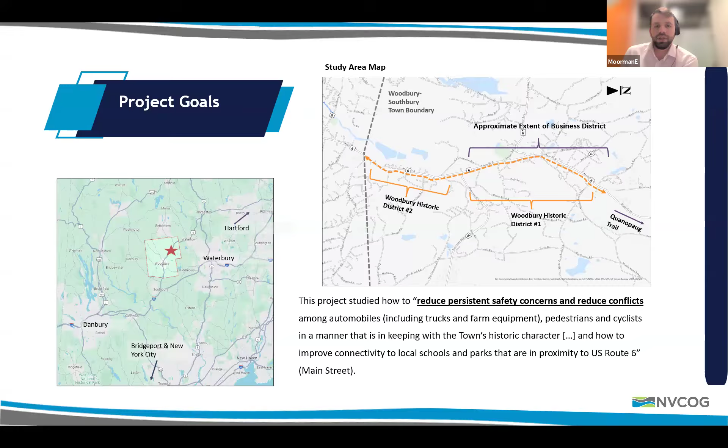So I'll just take a minute on the project goals and scope review. We're charged with reducing persistent safety concerns and conflicts among automobiles, pedestrians, and cyclists in a way that maintains your town's historic character. We also want to improve connectivity to local schools and parks close to Main Street. Our focus is on Main Street, but we're also charged with recommending sidewalks and other strategic connections east-west. Here on the image in the top right, we see the 2 historic districts in your town.

Here's the scope. We have five different sections: public outreach and engagement, data collection and analysis, future conditions, concept development analysis, and number 5, final report and implementation plan. So we're creating the final report now, but of course we welcome your views on concept development.

Throughout the whole process, I want to really thank you all for your feedback. We have 2 advisory committees, the TAC and the PAC. The TAC is more technical and involves a lot of CTDOT people. We met with them a week and a half ago or so, and we've taken their feedback and incorporated it into what you're going to see here. Hopefully that will be fruitful for us. And throughout the whole project, we've had project management, of course.

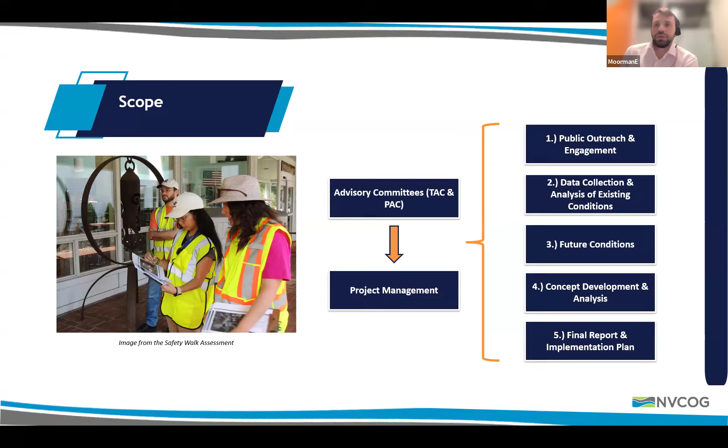Okay, I just want to break this into 2 sections. As I said earlier, we have the initial concepts and cross sections along the entire corridor. We analyzed the feasibility of creating a shared use path based on topography, spatial availability, physical constraints. The presence of utility poles was a big input in this analysis in your town, and of course, integrating with existing and planned facilities.

So we analyzed a shared use path. It's also sometimes called a side path, but we try to keep using shared use path for consistency. It accommodates all users, pedestrians, bicyclists, and others in a shared space. You can separate them, but generally speaking it's best to think of it in a shared manner. This was chosen because it most completely separates users, pedestrians and bicyclists, from drivers, which is appropriate on larger streets with higher traffic volumes. We know that biking and walking with traffic, especially once you get to higher volumes and speed, is uncomfortable. So we propose to completely separate the users.

Additionally, we are building on the work of the Woodbury Plan of Conservation and Development, which is the town's planning bible at a high level at least. And that mentions the importance of improving bicyclist safety and comfort.

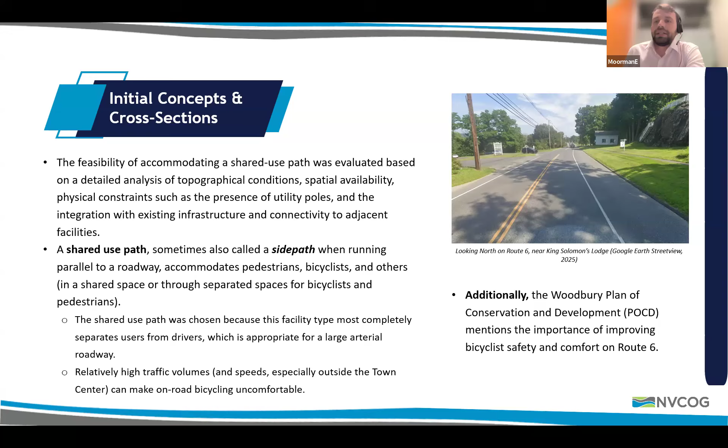So here I just want to show you a little bit more detail with the shared use path and why we're using it. As you can see on the bottom left, the FHWA, our federal government, offers guidance on recommended facilities. On the left axis you can see volume, vehicles per day, and speed on the x-axis, miles per hour. Generally, as you get higher volumes and higher speeds, you have to offer increasing levels of protection to maintain that level of comfort.

I just wanted to show where we are in Woodbury. In terms of miles per hour, we're certainly north of 25, 30, sometimes 35 miles an hour. And in terms of volumes, we're looking at 8,000 or so, or a lot higher if you look on the left. So it's generally over 8,000; in some locations it's a bit higher.

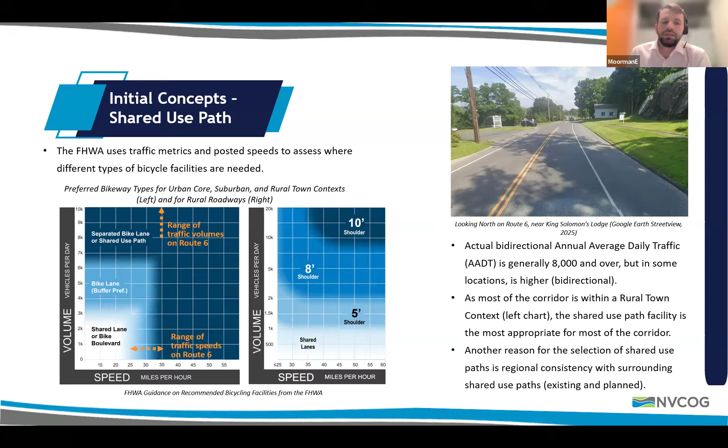Because the corridor is within a rural town context, which is the left chart, the shared use path is the most appropriate. This chart here on the right shows what you can do in a more rural environment outside of town, where a shoulder might be more appropriate. But we're within the town, so we're going to use the one on the left. Another reason is that we are trying to tie into surrounding shared use paths, existing and planned, so we think building on that makes sense.

For design principles, it can range from about 8 feet at the very minimum for short distances, to ideally 12 to 14 feet, which is good when you have higher volumes. You can include a 4-inch center line stripe, but this is not necessary and not recommended in the project area, as we don't anticipate that level of bicyclist or pedestrian volume. Of course, you need shoulders, clear space, and ideally a horizontal separation between the road and the shared use path of about 5 feet. Importantly, when crossing roadways, you can elevate the shared use path as well, and we recommend that in certain areas.

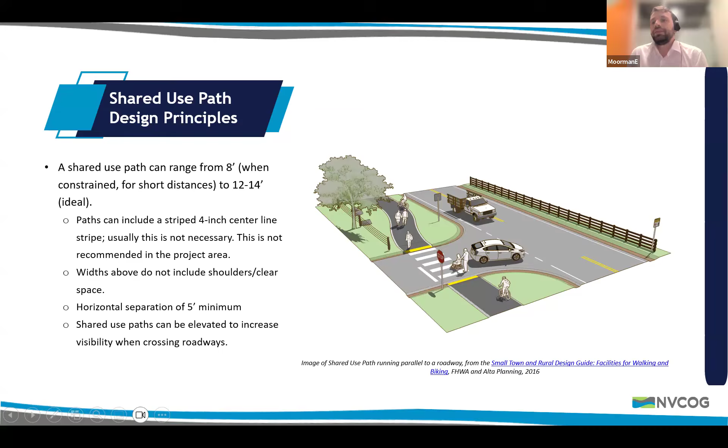So here's the general concept laid out. It's proposed along the east side of the roadway in the southern portion of town, extending from Woodbury Place, we're calling Constantine's Restaurant, that general area, to the intersection of Hollow Road, Doolittle Hill Road, Main Street, Park Road. At that point, or slightly north of that point, we're proposing to cross over onto the west side of the roadway to boost connectivity and accessibility for the central section of town.

As I'll talk about a little bit later, there is a short alternative where the path stays on the east side until 317, and we'd love to hear your views on that. But at that point, it would cross over at 317. We're recommending major urban design improvements near Hollow Park, and then other strategic intersection improvements.

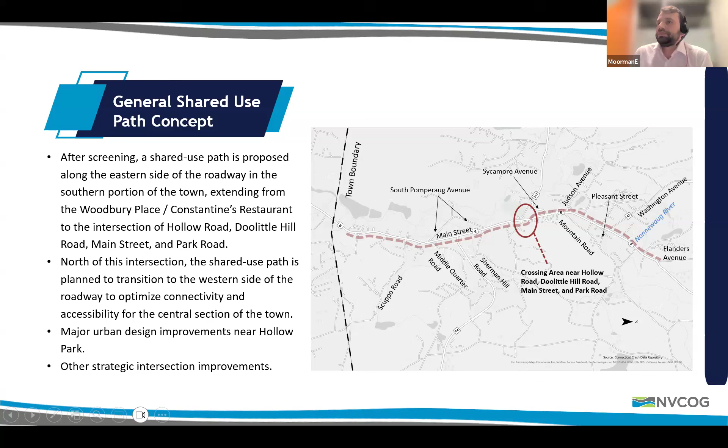Here's just some sample dimensions. In the past months, we took the existing widths of the different components of the right-of-ways. You can see here on the top left and the bottom left at 2 different locations. Location 1 is between Sherman Hill Road and Old Sherman Hill Road at the Dollar General, and location 2 between Highway 317 and Mountain Road.

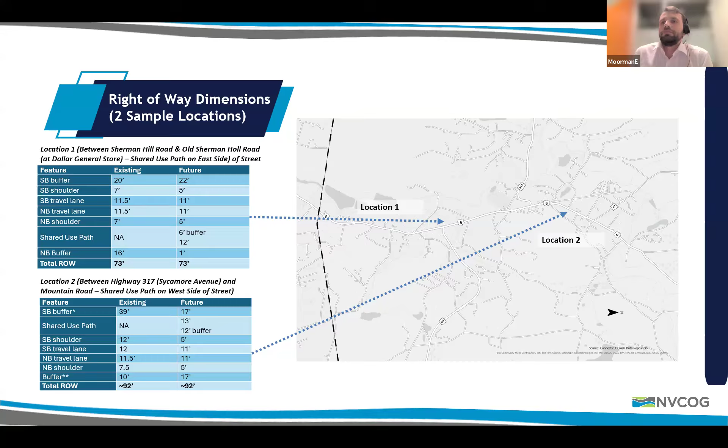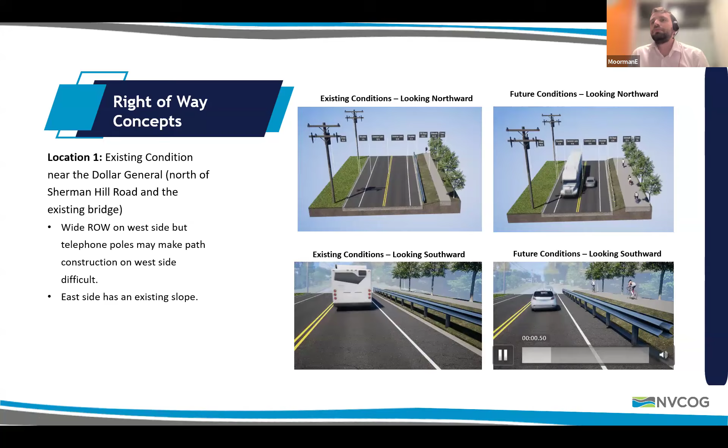Location 2 is near Drakeley Real Estate, just north of the intersection with 317. As you can see here, the top shows that high-level view, and now we are on the west side of the street, and you can see that nice wide path that you have in your town on the west or left side. Just give me a second, the animation seemed to slow it down.

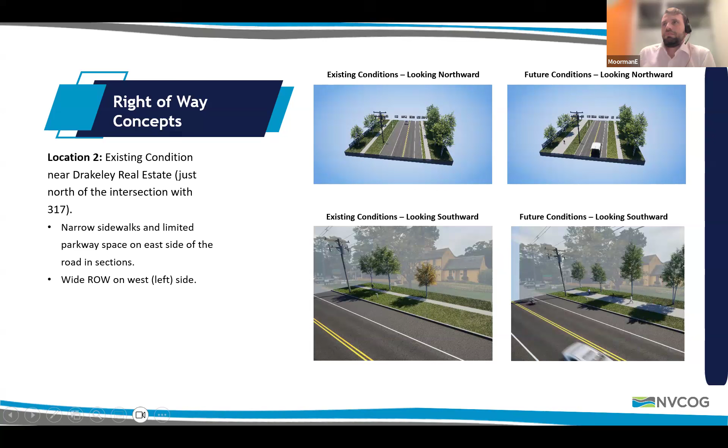Okay, so where does the path begin and end? As I mentioned, on the southern side, we're proposing it begins at Woodbury Place, Constantine's Greek Restaurant, which is on the east side of the roadway. So we'd start there, and then on the northern end, it would extend to Flanders Road to serve dense housing developments on Quassuk Road. However, we'll talk a little bit more about this.

Middle Road Turnpike could serve as an interim northern endpoint if you break it into stages, as we're recommending, and that would allow students to access Nonnewaug High School. And we'd recommend an RRFB to help people cross at Middle Road Turnpike. So that's sort of where we're going: Woodbury Place all the way up to Flanders Road, with an interim point of Middle Road Turnpike.

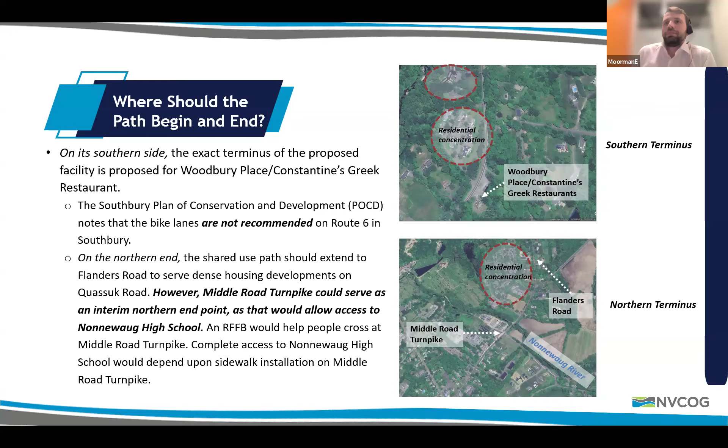So here I'm just going to quickly go through these, because I'm going to go through them in more detail in a minute. We'd start here on the east side of town. We've identified some sightline issues near Curtiss Road. We go north, and we are recommending an RRFB just a little bit north of Constantine's Restaurant, because there are communities here on the west side of town, some condos and dense housing developments that we want to make sure have access to this shared use path. They're on the west side, the path here is on the east side, so we'd recommend adding in an RRFB with other treatments to increase safety.

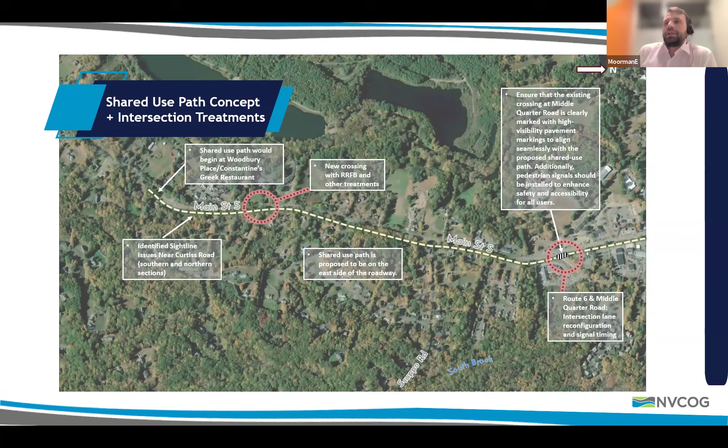So we go up on the east side of the roadway, cross Middle Quarter Road, and we put in high visibility pavement markings, and install pedestrian signals to enhance safety and accessibility for all users. At the same time, we do intersection lane reconfiguration and signal timing.

Hey Evan, just before you go, there's a question—do you want questions during it, or do you want to wait until we're all done? I think we can take a few questions now. Go ahead, I have a general question.

When you talked about the RRFB, those are the rapid flash beacons. Can you briefly explain what that is or what it looks like for these sections? I'm sorry, can you repeat the last part of that? What does it mean for these sections to have the rapid flash beacons?

To serve as a warning, coming up against the curves? Go to the picture, Evan, of the existing one. Let me—I forgot, was that back? And while you're doing that, the purpose of the RRFB is that it is more visually attention-grabbing, it draws more attention than just a sign. You had it right there—yeah, so that's an RRFB.

So it's a sign mounted, essentially an enhanced warning sign. The warning sign normally just tells you there's a crosswalk here. The black box below the little arrow on the post flashes when activated, and that's what drivers will see, particularly at night, but also very noticeable during the day. So it's essentially an enhanced warning sign, the most aggressive passive measure we have.

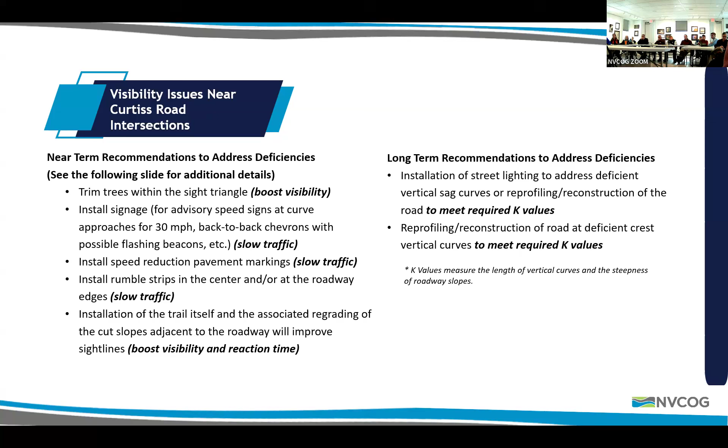I just want to share a follow-up on that. One of the major criticisms we have about the current one is that some drivers can't see it because the sign is set too far back from the road, and they don't see it until they're right on it. So are you saying what you're proposing in this new section will be different? It will be closer to the road? Yes, the sight lines will be better.

Yes, I know what those people are talking about regarding the one near Mountain Road. This one, the one we're proposing here, we've looked at the sight lines. They're much better. I wouldn't say more appropriate, because that implies the other one's not, but it's a much better set of sight lines than the one in town today.

One thing is, I think it's important to think about RRFBs in concert with other features. We've heard from all of you and others about the lack of efficacy of the RRFB on Mountain Road near Judson, and we are proposing improvements there too. We want to make sure you understand that we're working to boost the RRFB's visibility, so we sometimes do other treatments with that, and I'll go into more detail when I talk about Mountain Road.

Okay, any other questions for now, or good to go? I think we're good right now.

So here I just want to show you, the trail would be on the east, with these housing developments here on the west, and there'd be a sidewalk on the other side of the road, to allow people to get to the RRFB and walk to the north, cross, and get to the path. That's another recommendation we're making there.

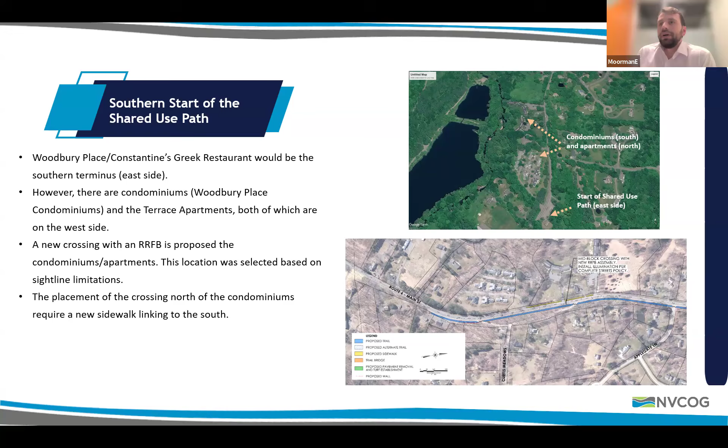There are some visibility issues near Curtiss Road intersections. There's a speed limit of 40 miles per hour at this point. There's a vertical crest along the roadway which reduces motorist line of sight, shown here in number 1, creating a potential safety hazard. Immediately south of Curtiss Road, the horizontal curvature of the roadway creates other sightline obstructions due to vegetation, stone wall, and utility poles, which also limits visibility.

South of Curtiss Road, shown here in number 4, there's a vertical sag curve which currently meets a 20-mile-per-hour design speed, so it's designed for 20, but people are going 40 or sometimes even higher. Then, number 3, as you move north, there's an additional horizontal curve with some sightline issues.

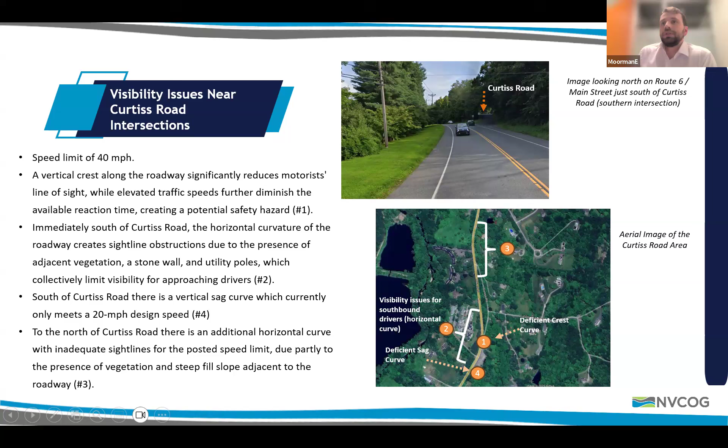So there are some existing problems here that we want to improve. We have near-term and long-term recommendations: trim trees within the sight triangle, install signage for 30 miles per hour, back-to-back chevrons with possible flashing beacons, which I'll show you in the next image, speed reduction pavement markings, rumble strips in the center and/or at the roadway edge, and installing the trail itself. The regrading required and cutting of foliage will automatically boost visibility and reaction time.

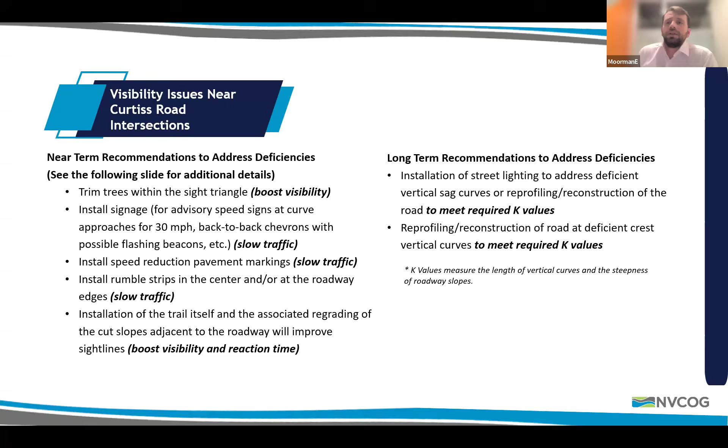Long-term, we recommend installing street lighting to address the deficient vertical sag curves, and reprofiling or reconstructing the road at deficient crest locations. That's a long-term thing we're recommending.

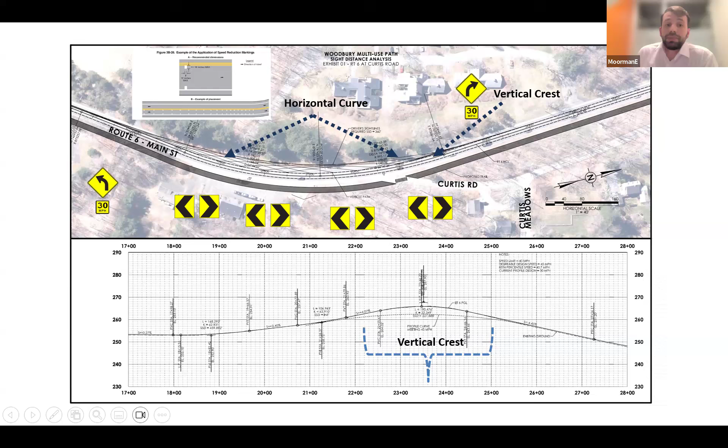Here you can see what that looks like. On the top left, there are speed reduction markings, little white markings in the roadway, that automatically narrow the road as it appears to drivers. This means drivers react as if they're driving faster than they are, because of these repeated dots. That's one example of what we're recommending at that location to slow down drivers, especially since we're talking about installing an RRFB there.

Okay, Middle Quarter Road. The main concern we heard is that if you're going west and hitting Route 6, there's a pretty broad westbound approach lane, with mixed traffic sharing an unmarked 33-foot lane, which is rather confusing and could cause some danger.

So we propose reducing that to 14 to 15 feet and making it clear that it's one lane instead of two to three. We feel this could enhance safety and improve pedestrian and bicyclist crossing comfort, as well as driving safety. There's very minimal impact on traffic flow, and the future level of service is expected to remain an A, which it currently is.

We recommend high visibility crosswalks with stop bars across all roadways. The stop bars in particular would discourage drivers from blocking in pedestrians. There would also be new pedestrian signals and a new sidewalk on the west side of the roadway, shown there in yellow.

We're also creating a small new green space near South Brook. It's not a huge amount of green space, but it is a modest increase, and hopefully will be more aesthetically pleasing and environmental. So that's what we're proposing at that intersection.

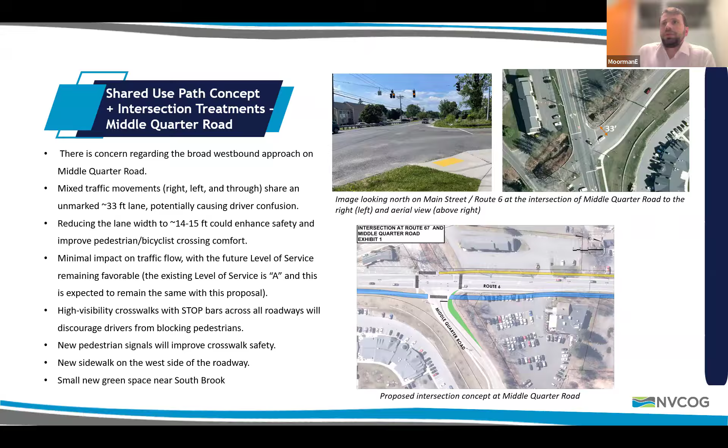As we move north, I want to give you a high level view of what I'll talk about over the next minute. At Sherman Hill Road, Route 64, we're talking about upgrading signal timing to improve operations, narrowing the right turn pocket on Route 6, and creating some nice new green space. At Hollow Road, as we've discussed, we're switching from the east side to the west side, with a whole suite of improvements that I won't go into on this slide, but will on subsequent slides.

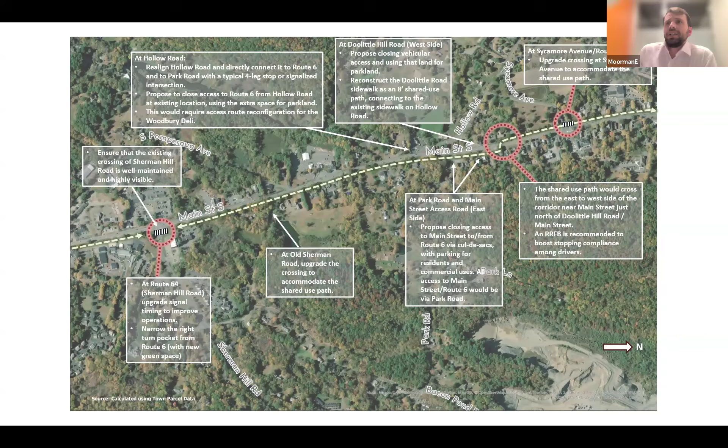And then at Sycamore Avenue, Route 317, we'll upgrade the crossing to accommodate the shared use path. I'll go into more detail, particularly at that Park Road location. But first, let me talk about Sherman Hill Road.

We'd maintain the current travel pattern generally speaking, while upgrading signal timing, integrating that with the new shared use path on the east side. We're proposing to preserve the two existing high visibility crosswalks at the intersection to maintain pedestrian visibility, and recommending adding a new crosswalk on the north leg.

We want to retain existing left turn movements from Route 6 Main Street and the left turn lane from Sherman Hill Road, Route 64. The big change here is shortening that right turn pocket from Route 6 and using that space to add new green space south of the intersection. This will also slow down traffic and help increase safety there.

We're proposing to keep the shared left and through lane on Sherman Hill Road. The existing and projected level of service would both be a B, so this would not degrade traffic or make it worse.

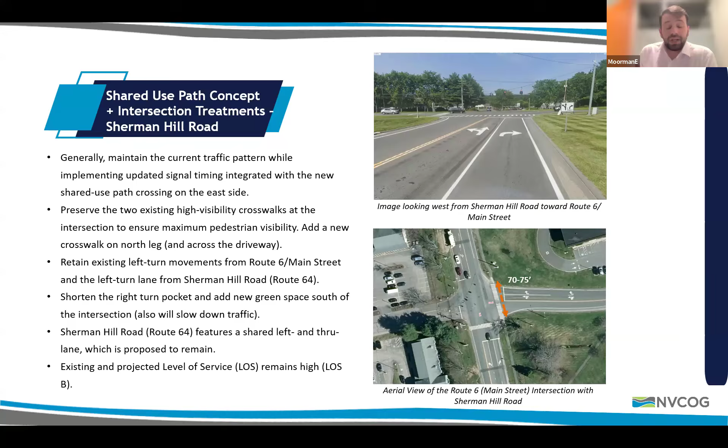Here you can see what that looks like. There's that new green space as we're shortening that right turn pocket. There's also a new sidewalk on the south side of Route 64 linking to the Woodbury Flea Market, shown in yellow. That's a location people had talked about wanting to access quite a lot, so we added that sidewalk connecting to an existing sidewalk there.

And then we're proposing sidewalks or shared use paths on both sides, which would require new bridges over a little waterway.

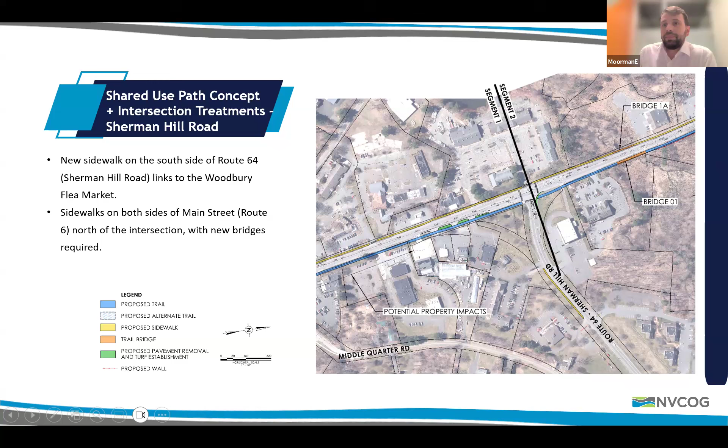Here's the main location we talked about: Doolittle Hill, Hollow Road, Park Street, Main Street area. The general concept is to switch the shared use path from the east side to the west side at a mid-block location near Main Street. There's an alternative, which is to continue the path northward on the east side without crossing the street, then cross later at Route 317. I'd love to hear what people think about that.

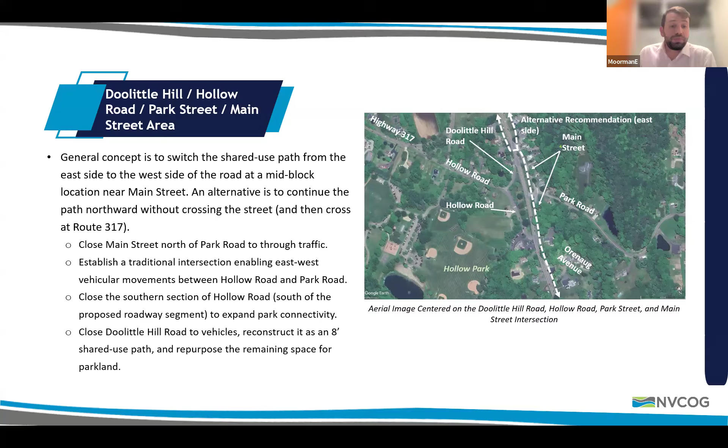Here are the different components of what we're proposing. We're proposing to close Main Street north of Park Road to through traffic and establish a traditional intersection to enable east-west vehicular movements between Hollow Road and Park Road. We want to close the southern section of Hollow Road, south of the proposed roadway segment, to boost park connectivity and tie the park closer to the town. Then close Doolittle Hill Road to vehicles, reconstructing it as an 8-foot shared use path, using that space for parkland.

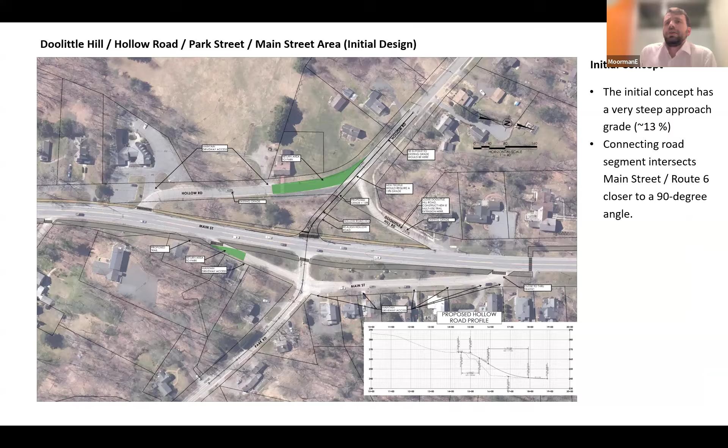So this was the original concept, and I want to show you how it's evolved. The green shows the new green space we're proposing, and this new traditional intersection here. The initial grade was very high on the roadway, so we changed it from 13% to 10%, which is still a pretty steep grade, but a lot better.

Access to homes and businesses from Main Street would use an access road from the south. Right here, as you can see, we still maintain access to these homes and businesses respectively.

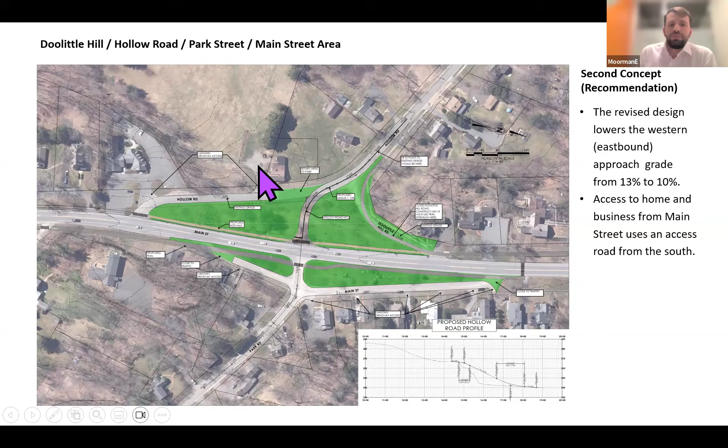The third recommended concept is this, and there's an option within that concept to keep the trail on the east side. After talking with the TAC, we heard that many people make left turns here from Route 6 onto Hollow Road and Park Road, so we decided to add left turn lanes on Route 6. Because of that, we want to keep this crossing away from those left turns. There was discussion about moving the crossing into the intersection itself, but we decided to keep it north of the intersection right there, and this crossing would have an RRFB with advance yield markings.

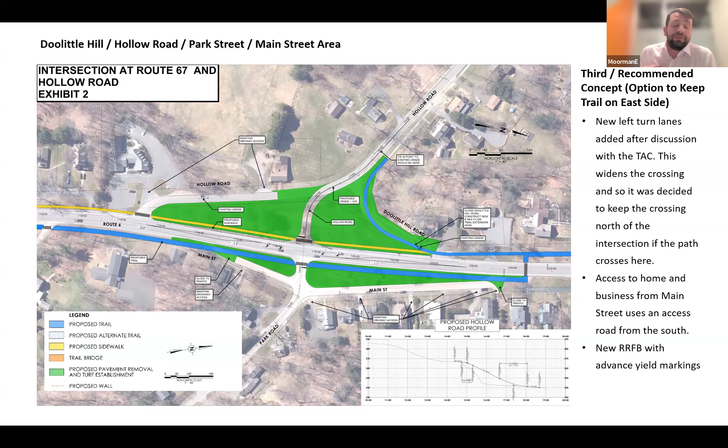So that's the concept we're at right now, and then there'd be that shared use path going down into the park. You'd gain a lot of connectivity and we feel better access to the park. But we'd love to hear people's thoughts on that.

We were able to do this because traffic volumes were pretty low, but there are still some issues with this. The new grade, 10%, is still steep for certain drivers at certain approaches. We're still maintaining driveway access for these two businesses here. We are recommending to add left turn lanes, which helps drivers, but of course it widens the cross section and potentially could make crossing a little bit more difficult.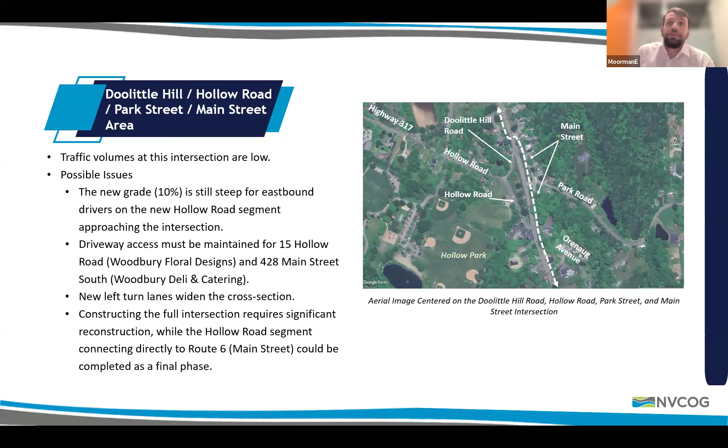Constructing the full intersection requires a large amount of time and money, and so this could be broken into different sections and different phases. So that's just something to think about.

Moving north to Route 317, Sycamore Avenue, we want to talk about what we're proposing here. You can see this image shows the new recommendation. I'll give people one more minute to look at that.

We're recommending new left turn lanes on Main Street, Route 6, with shared through-right turn lanes at each approach. We've heard from many people that adding left turn lanes would be helpful, because when someone's waiting, they're not holding up the crowd behind them and drivers aren't zooming around them. We feel this would help safety for everybody—drivers, bikers, and the like. This new left turn lane in particular will assist southbound drivers turning into the government center complex and turning into the library; that's a pretty common movement there.

We're recommending enhanced pavement markings to make it more clear to drivers not to encroach on those parking spaces on the western side of the roadway. At this location, there's an existing curb extension that's fairly new on the northwestern side of the roadway, so we recommend keeping that. We've shown and recommend maintaining ADA parking to make sure people with disabilities and others can park close by, and we are adding a modest amount of green space there, so hopefully that'll be helpful.

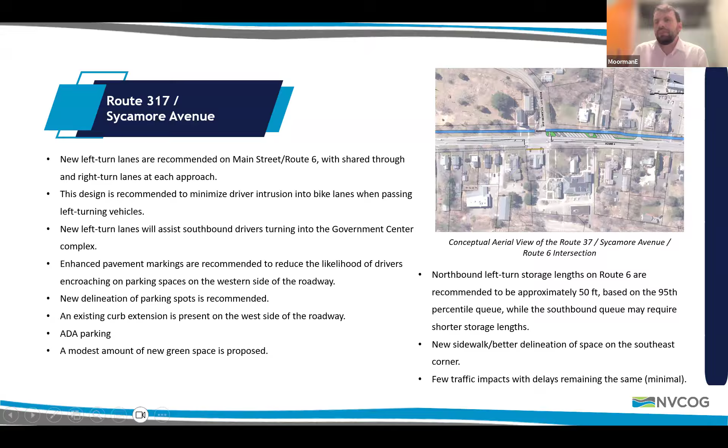One other thing I want to talk about is we're recommending a new sidewalk across the business on the southeastern corner of the intersection. It's sort of poorly defined. Pedestrians sort of walk through that parking lot there, and there's not really a curb. So we're recommending making that more clear, adding a new sidewalk there, and hopefully improving safety. This is what I'm talking about, that business. As you can see, the sidewalk's just sort of ill-defined. We want to make that more explicit while also maintaining parking for that business.

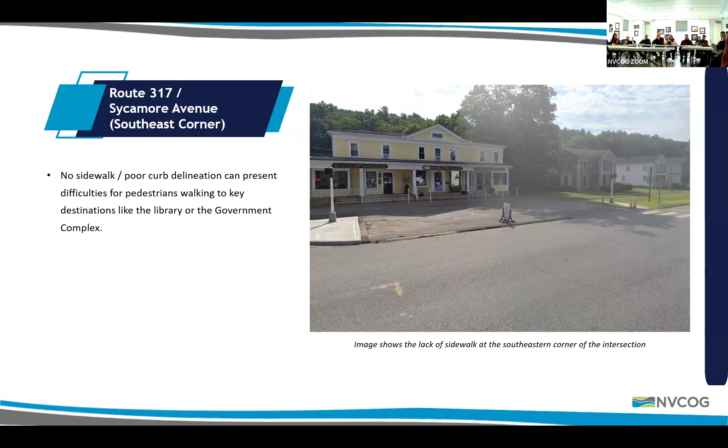We'll ask them. Okay, getting to the existing RRFB, how are we going to improve yielding? People have talked about poor yielding rates here, and certainly we observe that in field observations. So there's a few things we can do. An elevated crosswalk can literally elevate pedestrians and increase their prominence among drivers. That would be very helpful here, we think.

Important caveat here at the bottom: CTDOT has historically not allowed these on state highways. However, there was one recently installed in East Haven, and the department seems like they're currently a lot more open to that and exploring other locations. We did show this to them, and they do seem more amenable, more open to that. So we do have it in the report.

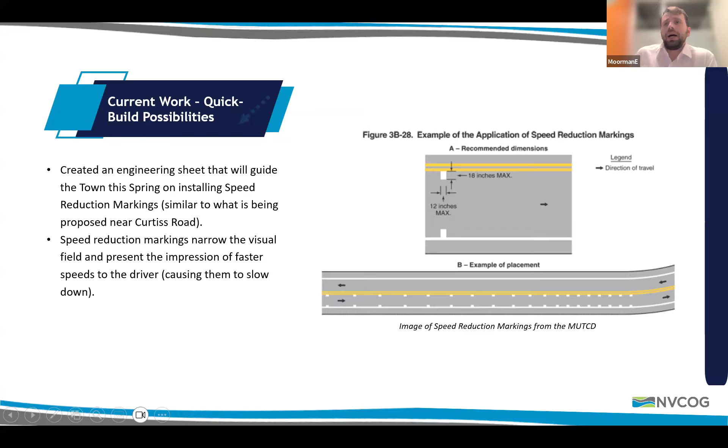Another thing are speed reduction markings, which I already talked about. Here's a better view than perhaps what you've seen earlier. Basically these white squares on the interior of the lane create the appearance of greater speed among drivers. And suddenly drivers say, whoa, I'm going way too fast, I gotta slow down. And they've been shown to indeed do that. So that's what we recommend in advance of the intersection. We have a little engineering drawing here for you as to roughly what that would look like to slow down drivers.

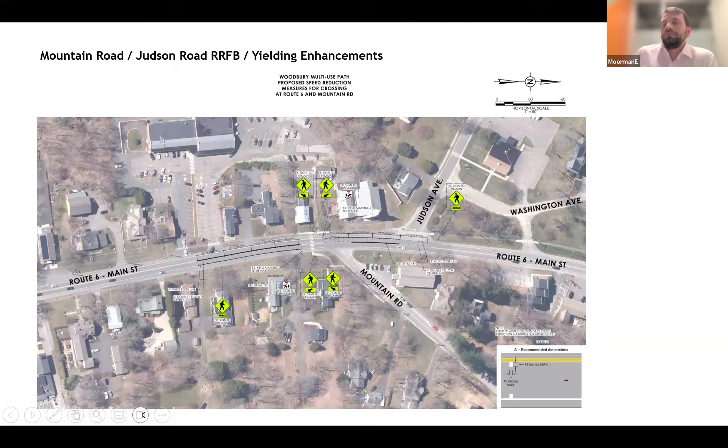Okay, looking at the time. Okay, heading into the final section. So this final northern section...

What are we recommending? At Judson Avenue, the new design of the shared use path could be used to shorten the crossing for drivers coming from Judson. That's something we noticed in field observations. It's sort of a wide lane. So using the new installation of the shared use path to shorten that crossing would be, we think, helpful for everybody. As we talked about at Mountain Road, install pavement speed reduction markings, and then longer term, raise the crosswalk.

Moving north at Washington Road and Pleasant Street, we have a suite of options that we'll talk more about in just a few minutes. We want to upgrade the crossing to accommodate the shared use path. We recommend narrowing the curb line for eastbound drivers on Washington Road who are turning right. You'll see what that looks like in a second.

Installing new left turn lanes on Route 6. Include granite curbing and parking striping at Canfield Corner Pharmacy parking lot. That's sort of similar to the other business I talked about, where it's ill-defined. The sidewalk sort of melds into the parking lot, and you don't really know where pedestrians should be and where drivers should be. So just clarifying that will help.

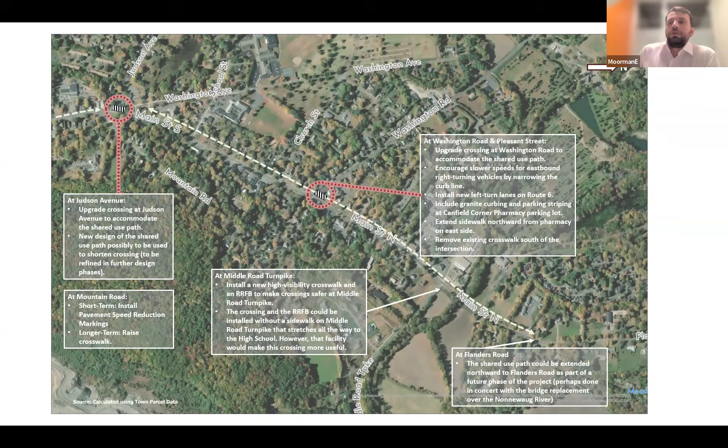So let me just give you a little bit more detail specifically with Route 47.

High-speed right turns from Washington onto Route 6 were cited by many. So what do we want to do about that? We want to extend the curb line north to reduce vehicle speeds and narrow the width path users have to cross. We'd add left turn lanes on Route 6, as you can see here in this image. I'll give some information on storage length that I won't get into.

The northbound left turn lane would require a longer left turn pocket than the southbound would. What does that mean for the existing crosswalk? It means we would have to remove that crosswalk south of Route 47 if we were to add in those left turn lanes. So just something to think about.

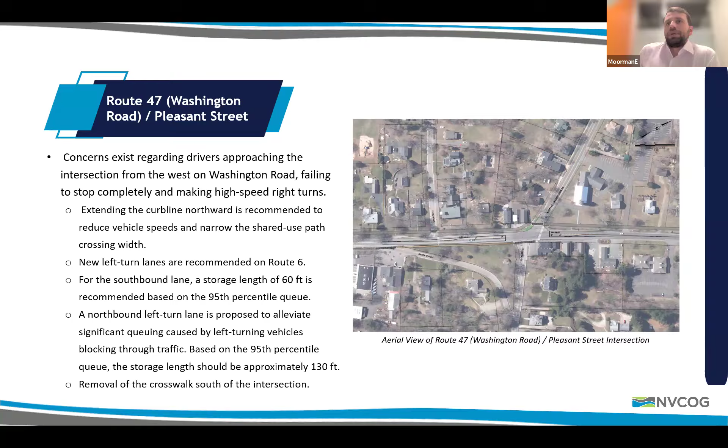Here's a better image. We'd be removing that crosswalk at Church Street, but we'd have 4 high-vis crosswalks right at Route 47. We'd have a new sidewalk on the east side. So we feel like the trade-off is hopefully good, but again, we'd love to hear your thoughts on that.

Okay, well, I'm looking at the time, so yeah, we're almost done. Again, just showing you, we made some large sheets for people, showing the overall design over 4 different sheets.

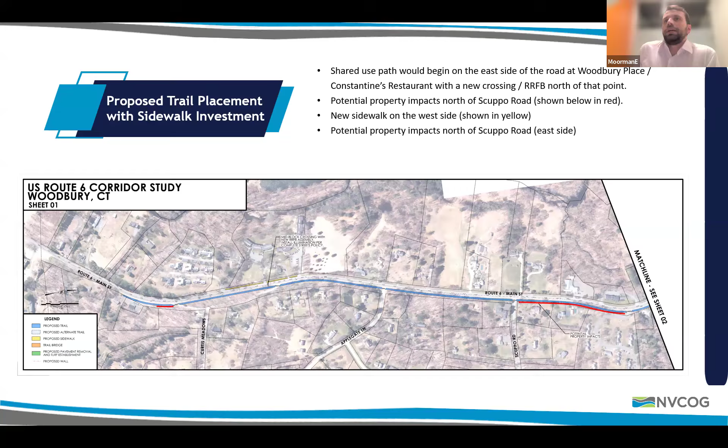Moving north, we're proposing a curb reconfiguration at Middle Quarter Road, new green spaces, and a shortening of the right turn lanes at Sherman Hill Road, with new bridges north of Sherman Hill Road. Those are in orange here. And again, a new sidewalk on the west side of the road.

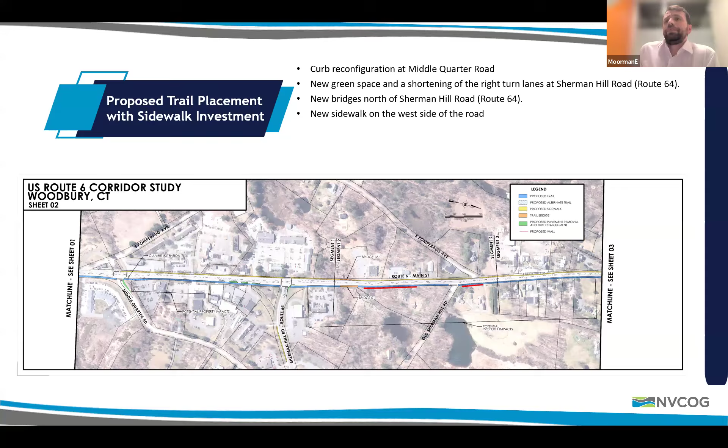So again, here, just revisiting this, we stay on the east side of the road until it crosses north of Doolittle Hill Road, using a new crossing and RRFB. That would benefit from Main Street dead-ending north of Park Road.

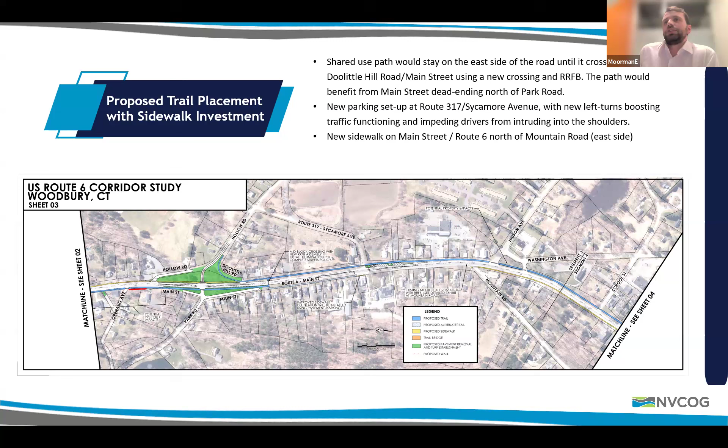That's the overall vision. There'd be new parking set up at Route 317, sort of better clarified with new left turns, boosting traffic, and stopping drivers from going into those shoulders as they do now. And there's new sidewalk on Main Street, Route 6, north of Mountain Road on the east side through the heart of town.

The shared use path is on the west side in this northernmost section, north of Mountain Road. There's new left turn lanes on Main Street, Route 6 at Route 47, Washington Road. There's a new RRFB at Middle Turnpike Road.

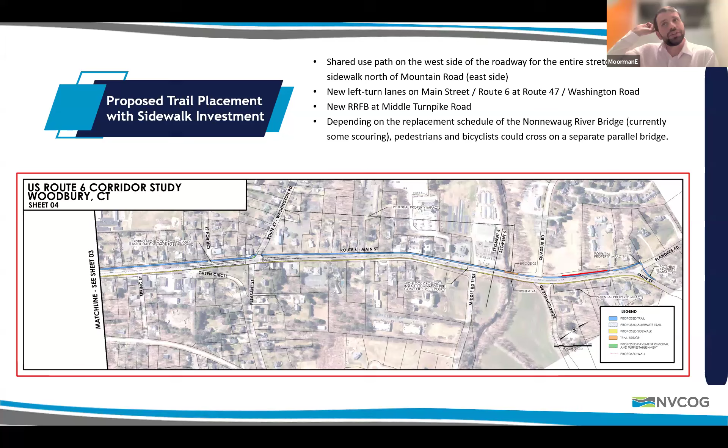Depending on the replacement schedule of that river bridge, there'd potentially be a new bridge, separate, that pedestrians and bicyclists could cross on. Again, that depends on the replacement schedule of that bridge. The existing bridge is in pretty good shape, but there's some scouring. The superstructure is in satisfactory condition, while the substructure underneath is only in fair condition. So that new bridge could be wide enough to incorporate that shared use path, or perhaps simpler, the shared use path could be installed on another bridge separate from that main bridge.

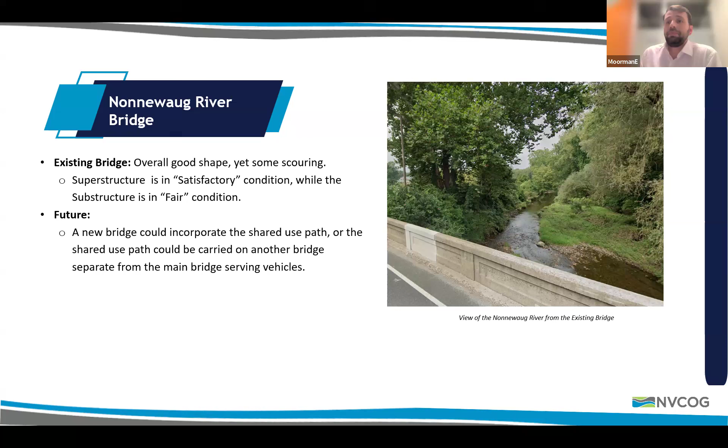And then here we go into the northern endpoint. The ultimate endpoint, the scope of the project, is Flanders Road. However, it might make sense to do that as part of a later project, again with the bridges. Middle Road Turnpike, we think, could be a nice interim endpoint, which would allow that connection to the high school.

We think that a new crossing here at Middle Road Turnpike with an RRFB with advanced yield lines would really help east-west connectivity in the northern part of this town. Again, we've looked at traffic, and to make a long story short, we didn't really find major impacts. We'll include those within the final report.

So just to conclude, the corridor concept is on the east side of town. It would cross over near the park to better serve the main commercial areas of the town, so there's better right of way on that side. We're proposing major urban design and access improvements near Hollow Park.

What type of traffic improvements have we talked about today? Lane narrowing, better pavement markings, safer ped crossings, and lane reconfigurations, new left turn lanes in particular. Signal upgrades along the entire corridor as needed, integrating that with the shared use path. New RRFBs in 3 locations with advanced lane markings and crossings that go along with that. And then, as we talked about at Mountain Road, your existing RRFB, how can we improve yielding for that and make sure cars are stopping in that center portion of town.

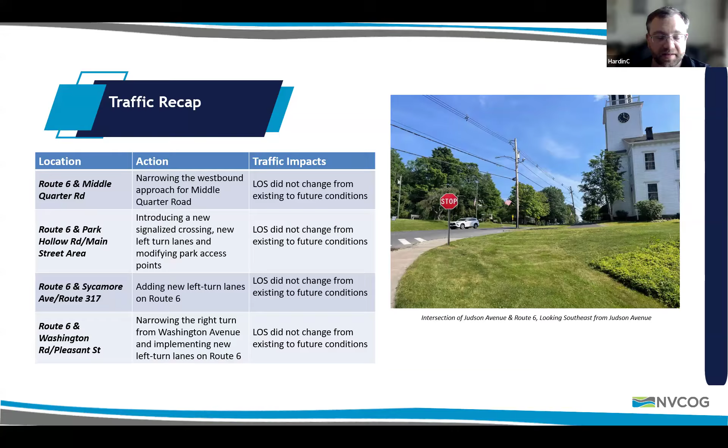I think the combination of both the recommended RRFB and the speed reduction markings at the existing one, in tandem with some of the additional narrowing that Evan mentioned on a couple of approaches in the southern section of the corridor, will have that effect. We maybe just need to be more clear in those slides noting them, because I think we've built those into these other recommendations, that kind of gateway treatment.

And one of the things we've heard and talked about is some of the landscaping that would go along with the shared use path. We want the town to still maintain its charm and be a pleasant place to be. So some of that landscaping will also help convey that message that you're not on a rural road anymore, you're now in an area where you can expect pedestrians and other activity.

What kind of landscaping are you talking about? Are you talking about trees? Are you talking about shrubs? I didn't see anything in here about that aspect.

Yeah, so the actual decision on what would go in probably won't happen until it goes more into a design phase. But it could be a combination of trees, shrubs, and flowers. I know the Shade Tree and Sidewalk Committee has done a really nice job putting a plan together for some of those elements of what the town looks like. We would want to make sure to respect the existing feel of the landscaping and plantings throughout town.

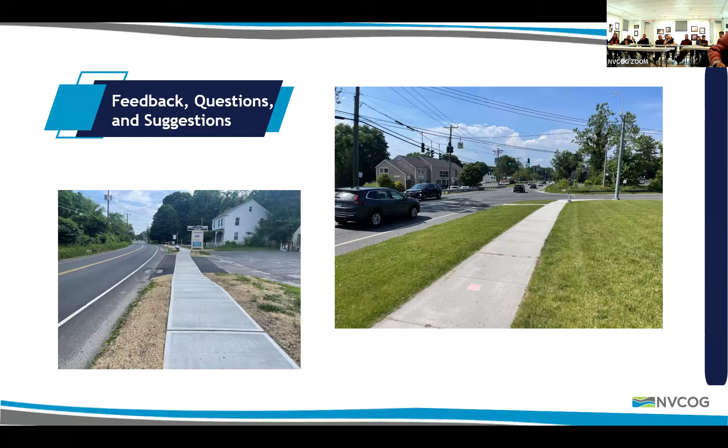I have a question on 47, where you have the intersection with 6. How does that impact the very large semi-tractor trailer trucks and oversized farm vehicles that I see making all kinds of turns at that intersection?

It's a very busy intersection, and I've seen them take full advantage of what is there right now to just get it through. And as much as I'd love to see that better controlled, I also don't want to see them nailing one of the buildings. They're very large trucks.

So a couple little aspects on the design detail side. The trucks turning off of Route 47, if you see how far back that crosswalk is positioned, that's done for a couple reasons. One, it's the shortest distance, but it also allows those turning trucks extra space to swing around their turn without encroaching on the travel lanes.

As this project were to advance, another thing that could help facilitate that is to make the curb on the top left quadrant of the intersection mountable, in case the back wheels of a truck do come across it. Ideally, we've got it positioned back far enough that most truck turning movements won't encroach upon the other lanes.

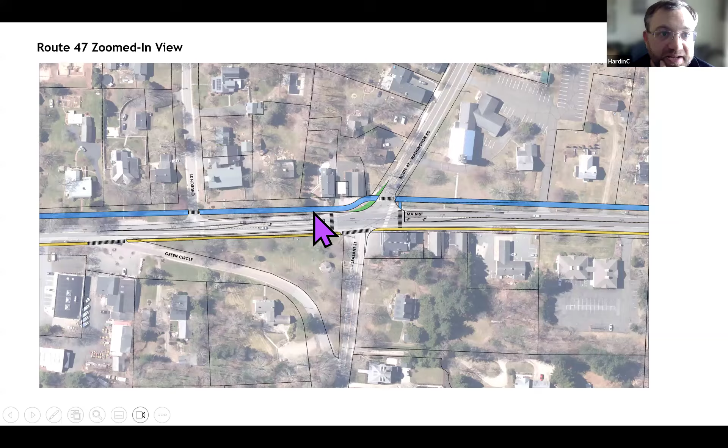Their parking is in the back. But very little, it's tight. Not for the business. You're talking about the blue side path through the front, which is existing parking, and that would essentially... I see, yes, okay. So that building on the corner is fine.

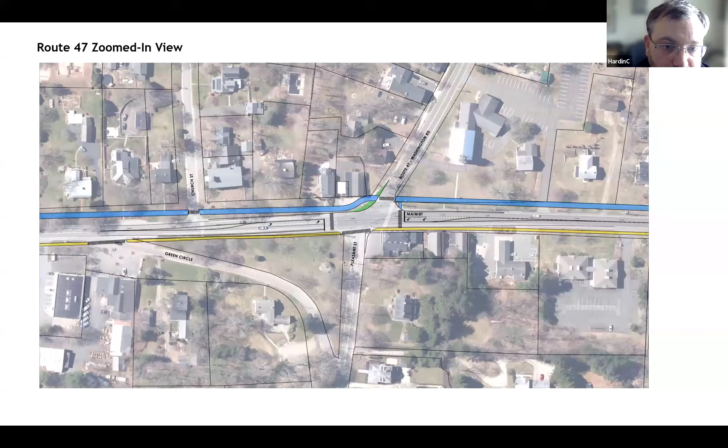Everything in front of there is state property, but the business that occupies the first floor uses it for their customer parking. Tenants on both of those houses park in the back, and there is some limited parking in the front. But it's all owned by the state, so any kind of path going through there would have to blend in naturally with the parking lot.

But it does make it difficult for people making a right-hand turn off of Main Street up Washington Road, very difficult, especially for our first few engines going up that road, because if you narrow that down, the vehicles cannot move out of the way or back up so we can get a truck around that corner.

Yeah, I also work across the street there, so I see many people coming south trying to make the right, and it's not easy. I don't know if that corner could be widened. Especially if you bring that lane over, it's going to make it an even tighter turn to get onto Washington Road.

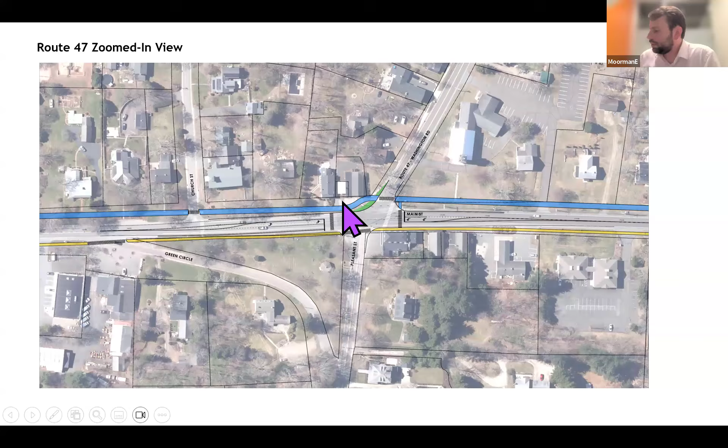There's two things: look at the right turn southbound, and also look at the parking right on the southwestern corner. Yeah, the little house there on the left had a commercial use, and there's parking in front of it too, that is in the state right of way, owned by the state. All of that parking was for commercial uses at one time. And if the side path or shared use takes all that up, they'll have nothing.

That might be an area where the path has to be almost near the road somehow, and narrower, not as wide. But coming down 47, yeah, you've heard it, they come whipping around that corner and make that turn. Maybe a no turn on red or something would be good on that corner.

No right turn on red. That's something that the owners at Campbell Corner recommended several meetings ago, because things were fine until we started right on red in Connecticut. And I know this came up at an earlier meeting, and it was shared with us that the DOT doesn't like to go back to all the turns being no right on red.

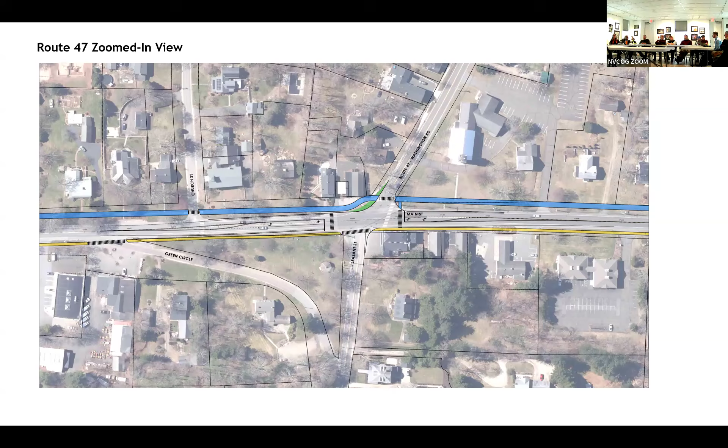But it's a very heavily traveled intersection with pedestrians, vehicles, and bicycles. I think everybody could live with no right on red, at least on that one approach. The other approaches are fine. They don't even stop there, they just roll right through.

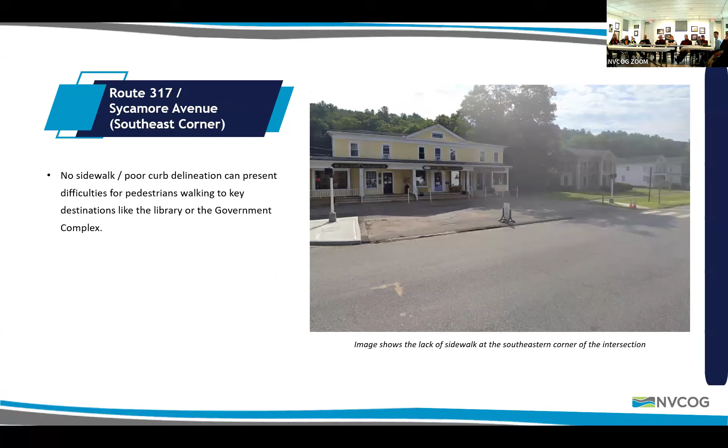Can we go back to Route 6 and 317 for a minute? I wanted to better understand how this will work and what happens to the parking near that intersection. Right now, with the new DOT sidewalk setup, you kind of take your life into your hands crossing the street in certain spots because it's not always visible to those making turns. Of course, they don't stop there either before turning. They just go flying, and it's not pretty over there. So I wanted to understand how you're going to improve this intersection, because it's really problematic.

You're talking about southbound drivers on Route 317. We hope and think the new curb extension will help, and the existing parking will be better delineated. I know that's a common thing we heard, that there were markings there at some point, but they've been so heavily faded it's unclear what that space is even for.

The state told us we couldn't have the markings when they repaved. We asked to have them put back, and the state said no. The DOT of the state said no. I can't tell you exactly who said no, but they absolutely told us we couldn't put them back, because they didn't have any comments in the TAC about the presence of these. That's good to know.

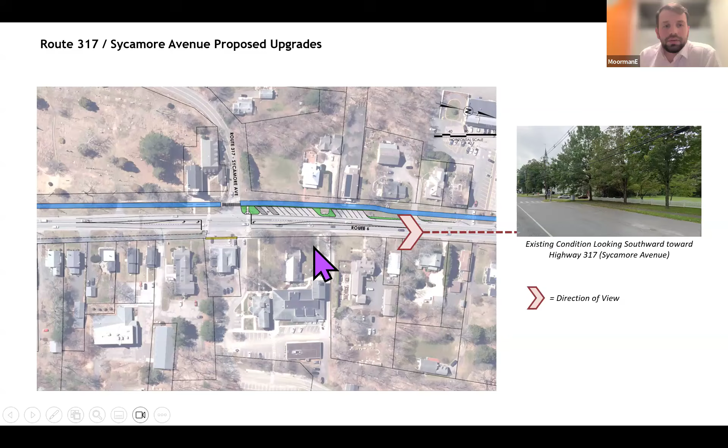You're mentioning third lanes. If we're not widening Main Street, how are we going to accommodate that? When did I mention third lanes? Left turns? Oh, left turns. We just used the existing space. There was some excess space, and we narrowed the lanes a tad bit. That's how we fit it all in.

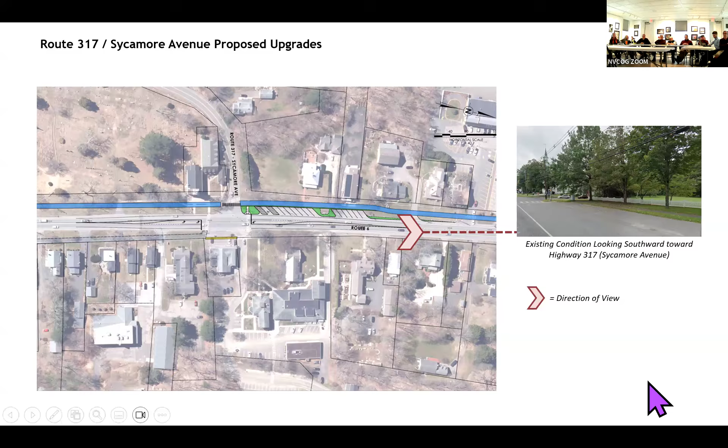Another idea—I've noticed the crosswalk at Mountain Road on Main Street is more specialized than the other crosswalks on Main Street. If you're going to do anything to one, I'd recommend keeping them all uniform, because people focus on that one and ignore the others since they're just painted lines on the road. Try to keep them more uniform, to create more awareness for drivers to some degree.

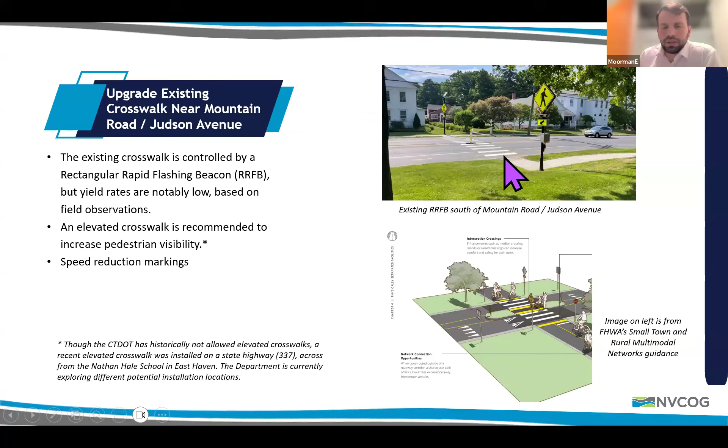Okay, just looking at that photo, I mean if you're going to raise that one a little, raise them all a little then. That's the only way to do it—I hate to say that, but whatever you do, try to keep them more uniform, that's all I'm saying. I appreciate that comment. I also got another comment about the width of the sidewalk or the path.

Some places I think it makes sense to be out to about 8 feet, but there are a lot of places in the middle of town, the historic district, where something 8 foot wide could take away from the character of that stretch. So maybe there should be recommendations as to width levels in various spots of the path, because I don't think we could do 8 or 12 feet all the way through town, from north to south.

I don't think that could be done. So we can't do 12 feet everywhere, but we can do 10 to 12 in most places. I can call out better the specific locations where that's not possible. Well, I just don't think even 10 to 12 in some of the historic paths would be visually aesthetic. There's an existing sidewalk there that gives kind of an old town flavor to it. And a wide, big new path going past some of these old historic homes may not meet that criteria of keeping the historic characteristic of the town.

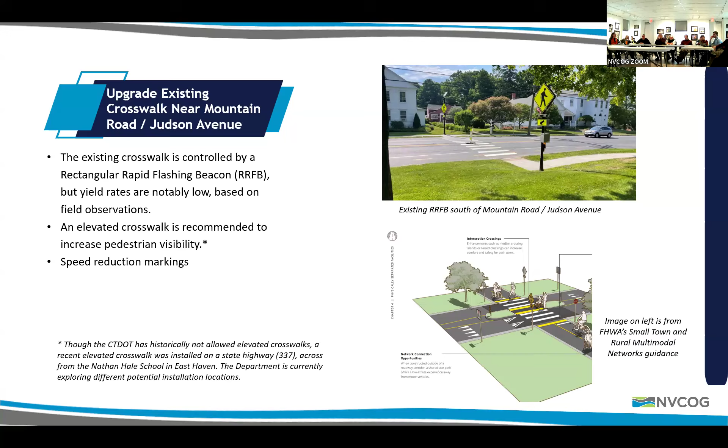So what is the minimum width that would be recommended for a shared use path? Minimum is 8, but that's in very constrained locations. We did talk to our sub-consultant AHS, which does historic preservation and maintenance, and they came up with some good ideas that are not here but are in the final report for how to ensure it looks good within a historical setting and fits.

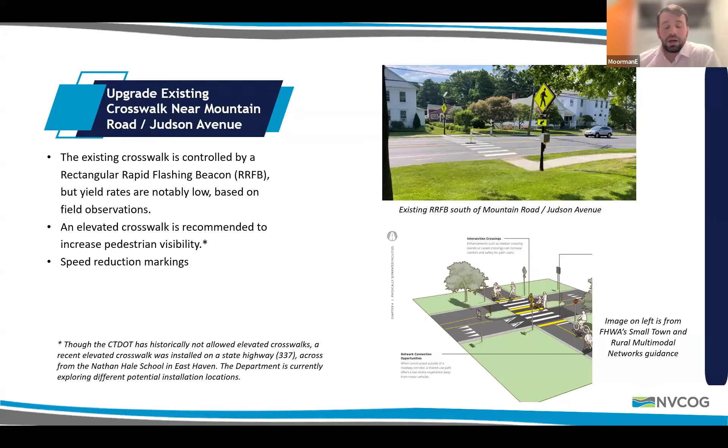So, an example of that? Let me see, one second. I'll stop sharing for one second. It relates to different paving types.

Might have a shoulder, the edges be a different kind of pavement, different colors—is that what you're talking about? Yeah, different direction, one can use different colors. The idea is you can see a narrow path that's more traditional, and then the edges are different, so it kind of blends more into the landscape. You don't get the whole stark thing being white across 12 feet. You've got a narrow path, 6 feet or wherever, that's white, then you've got the edge, but you have the pavement to walk on.

I think the public would need to see that to better understand what we're talking about when we talk about shared use, if that's one of the ways to address it. Because I'm with Tom, I think just a big 8-foot or 10-foot wide shared use path that isn't aesthetically pleasing isn't going to sit very well right through the historic district, just in general, because of the character of the town. If there are things done to make it aesthetically pleasing with different types of materials on both sides, it still allows traffic—I think it's important to share an example or two of what that is.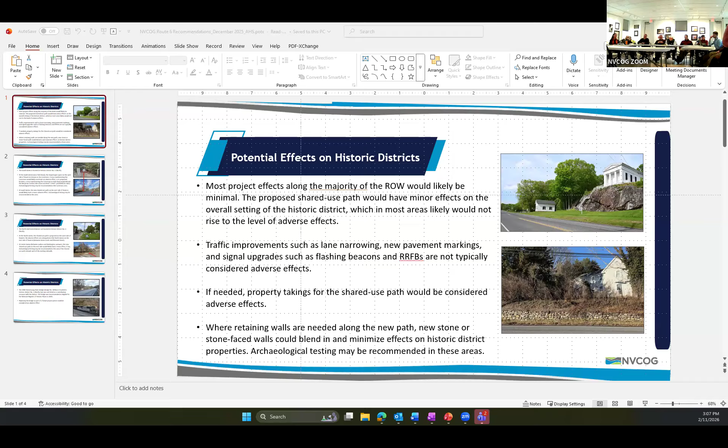I don't want to speak for her, but yeah, I think it'd be good to show some measures that could take a wide walkway and visually melt it into the surroundings, so it doesn't look wide, so it doesn't look like you could put a car on it. Let's not look at it that way. Okay, yeah, I will add that. I will absolutely add that. That'll help.

So here's the big question. Some of the things that have been suggested are safety issues. Are those safety issues that the DOT is going to put dollars out for, or is that something that falls to the town when you talk about the flashing beacons and things like that? Because clearly in this study you've identified some areas where we've got safety issues, and those cost dollars. So I'm asking the loaded question of who covers it and how does it get covered, or how does something like this all get laid out?

Did we lose Rich Donovan? Yeah, Rich had to step out for an FTA meeting, so we apologize. I guess I'll try to answer that question. It really depends.

This is a state road, state maintained. The next step is Evan and his team are going to put together the final report, the final recommendation. There will be a public meeting where we'll talk about it and present. But then the next step is really up to the town if they want to go ahead and start proceeding with these kinds of improvements.

Unfortunately, nobody has the money to do this all at once. It's going to have to be done in phases and steps. But if you have a plan laid out, at least you have a good plan going forward. So depending on what you want to do first, that's when we can start looking for what money is available to do some of these projects.